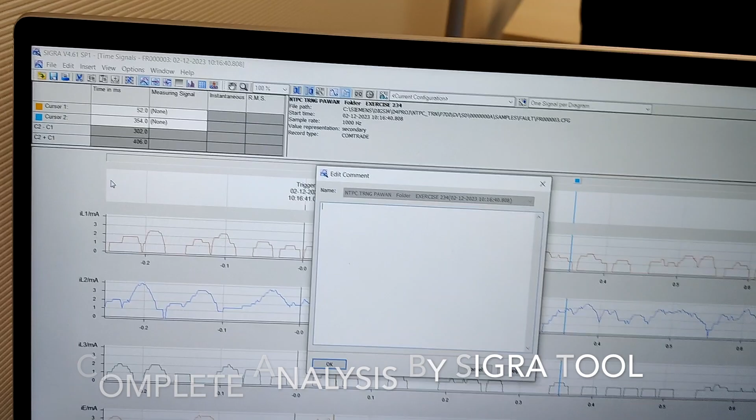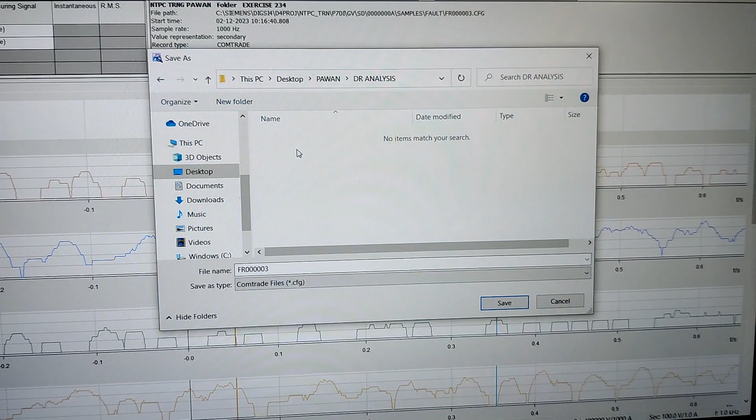Export this DR. So see here, whatever files I told you about, whenever I save a DR from SIGRA: the CFG file, .dat file, .dg4 file, .inf file, .xml, all those files have been exported here. Out of which CFG and DAT are mandatory for analyzing a DR. Only together can you open the DR, and the other things are auxiliary files. Maybe they will give you additional information. That's it.

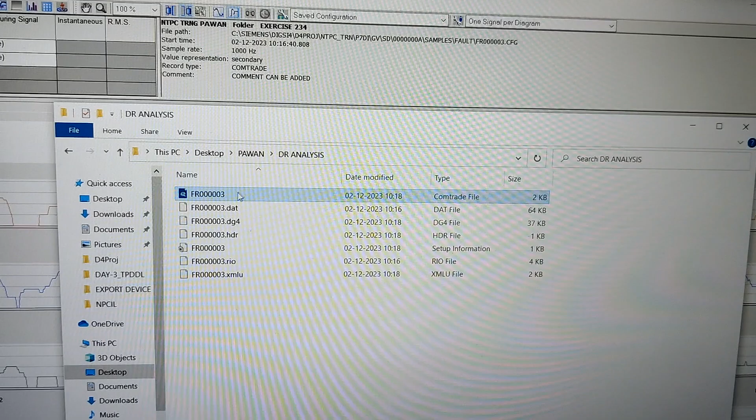So let me open this CFG file in Notepad. So how to do analysis without SIGRA? You can do a fault analysis even without SIGRA. You can open it in Notepad directly. So the CFG file, I told you, will have the configuration data, right? So here is the project file and the folder where the file exists, and 30 is the total number of channels.

And out of 30, 23 are analog channels and 7 are digital channels. So in this DR configured device, you have 30 channels recorded, out of which 23 are analog and 7 are digital. The 23 analog channels are given below: IL1, IL2, IL3, 3I0, all those things. And the digital channels follow after the 23 analog channels.

In the digital channels, you can see the first signal is flag last configure, this is the address number, and the last 0 represents that it is currently low in this DR. Similarly for relay trip and everything, because this is a manual trigger DR, all the digital channels are low, so that's why it shows 0 at the end. At the time the DR is triggered, if a relay trip happened by that time, relay trip will be high, it will be 1.

So this, which one, sir? This is the address.

Only for analog signals will you get the CT ratio and PT ratio. In case it is a CT channel, IL1 here is your CT channel. At the end you can see 2 into e power 2, which means 200, and secondary 1 into e power 0, which is 1. 200 by 1 is your CT ratio here.

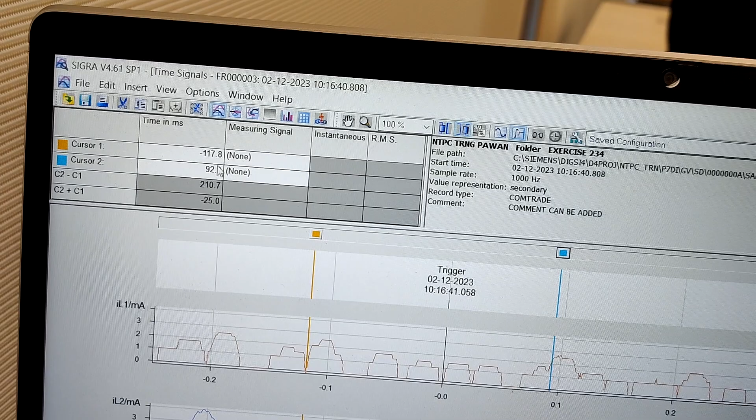So these two cursors are used to find the relative timing or relative threshold differences, for example between the time of tripping and pickup. You can keep the orange cursor on the pickup value and move the blue cursor to the trip value. In this table you will find the relative timing and which signal you want to measure. All the analog signals are available here. If you click an analog signal, you see the current value recorded in this DR at that moment. This is for cursor 1, the orange cursor, and this is for cursor 2.

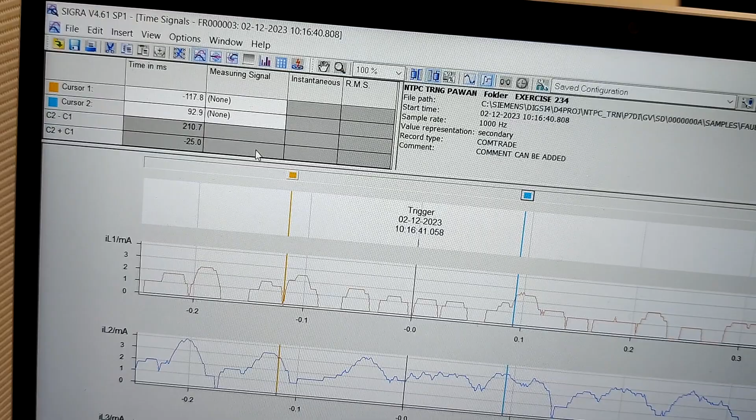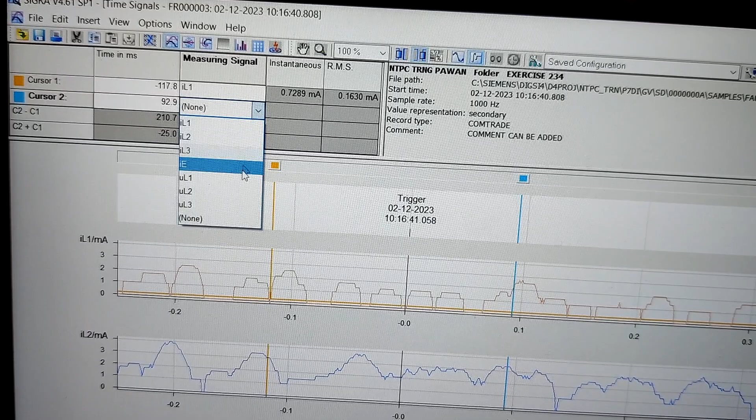But in this time scale, how will we know the moment when the relay has picked up? You will find it in the DR channel, right? If you are configuring a pickup digital channel for DR. We have to synchronize these things. And the timing here, which is 0, is generally based on your settings in the relay: start with pickup or save with pickup. It is not fixed actually.

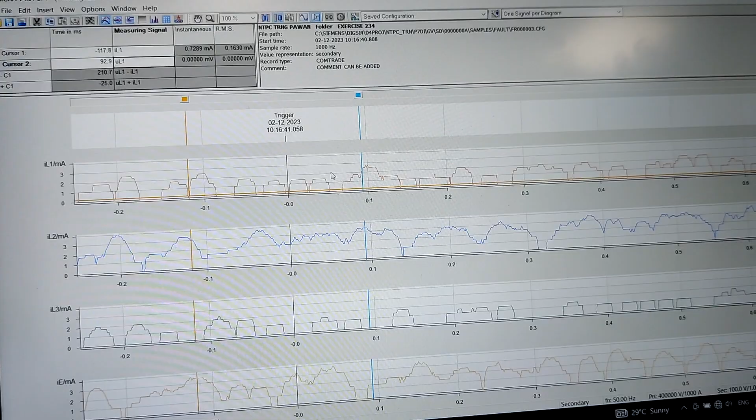You can move this cursor and find any values with it. The blue ones, those are the two cursors available, as per your flexibility. So go to the time signal and keep the red cursor wherever you want to know the values. Keep the cursor there and click the table view. The corresponding values of all the analog channels will be reflected here.

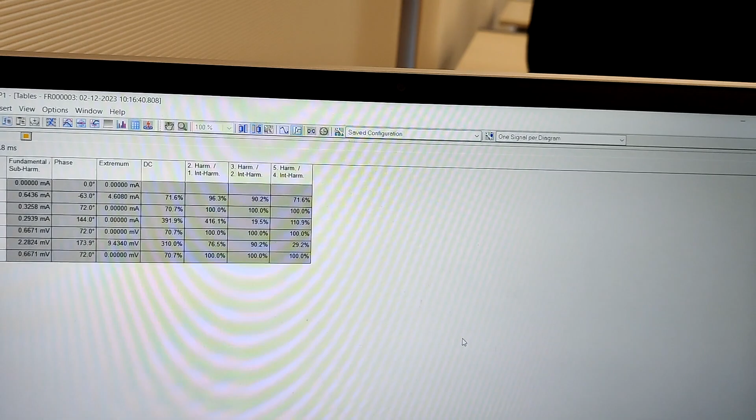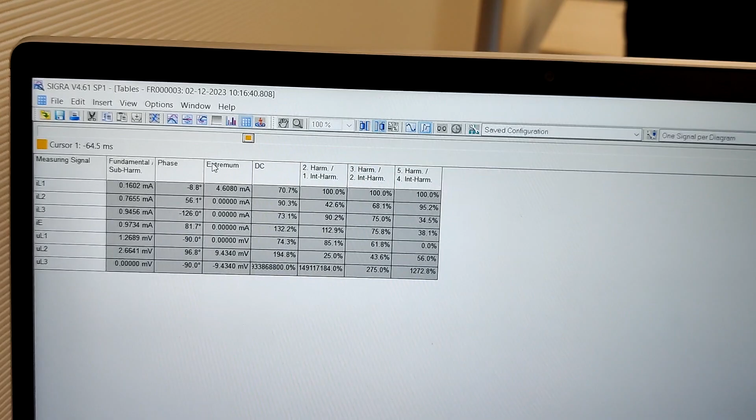But this view will be having only one cursor, and wherever you are keeping the cursor in the time signals, that will be reflected. But if you want, you can move here. Yes, sir. Harmonics I'll also explain. So the signals will be grouped. All analog signals will be grouped, current and voltage, and you can see them down. Then you can uncheck the signals also.

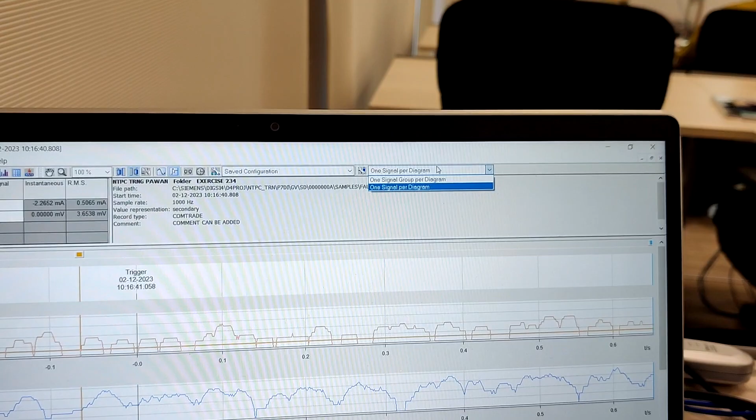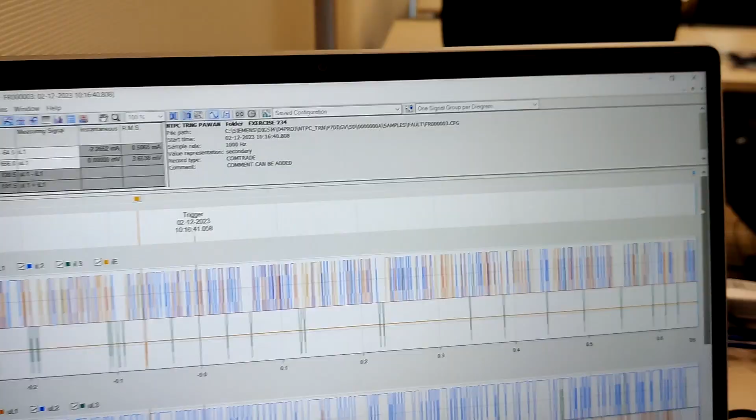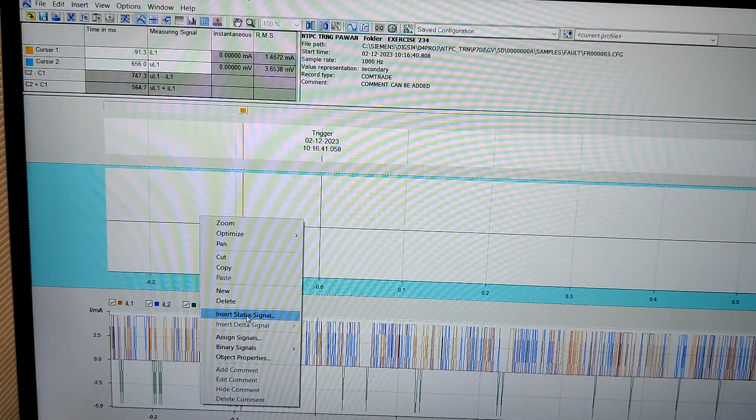Just 2 bits. So if you want again, just go here, new drawing. Then you can configure whatever signal you want, right? We can delete this, or we can add a new one. New is added. You can assign the signal. Insert status signal. Even you can group every signal to one diagram also. It's up to you. Analog signal.

And when you save this, it will be stored in the DG4 file. DG4 is a proprietary file, so it will be used for your profile. And then you can use different profiles also. For example, each user wants to view in a different way, right? So we can customize this and save it as a different user profile.

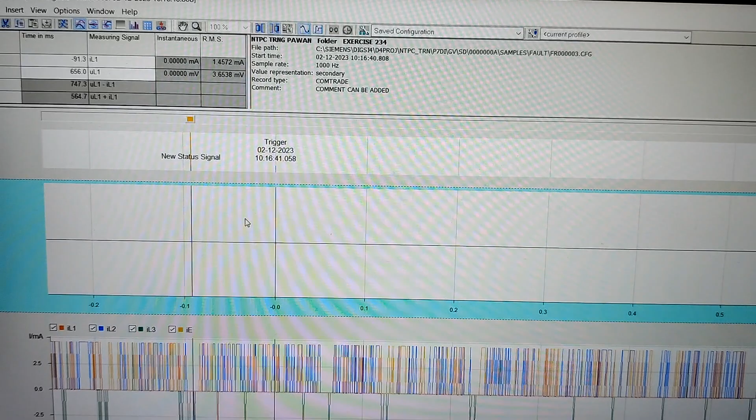Somebody will be familiar with seeing those signals individually. Somebody may be familiar with grouping those signals. So as per your familiarity, you can change and save only for you. Some other person will come and open it, and it will open in the default format.

Okay, and in the signals, Naveen has shown you those channels. So whatever analog channels have been recorded in this device, all those things will be there. Only thing is that you need to configure. It will not be visible immediately. For example, the frequency value will not be there in front of you immediately, but you can assign it from there.

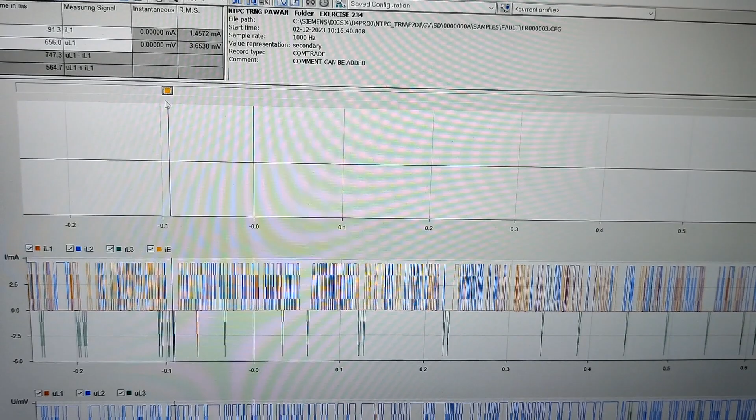Like how you do in the routing matrix, right? Like that, if you don't want another signal, just go and uncheck. And whatever signals you need, you can check. This is a triggered DR, so that's why it is showing 7.

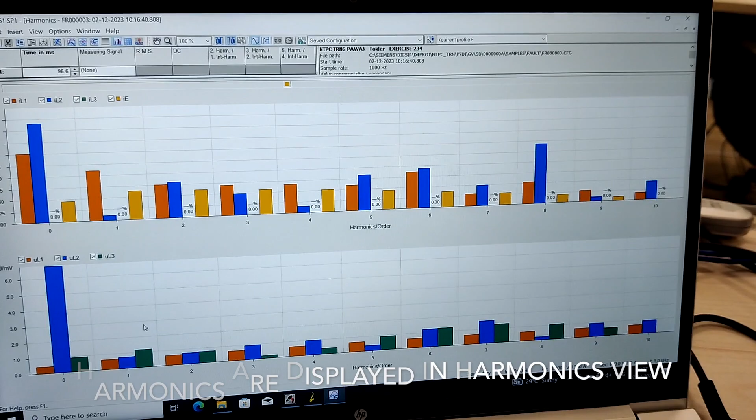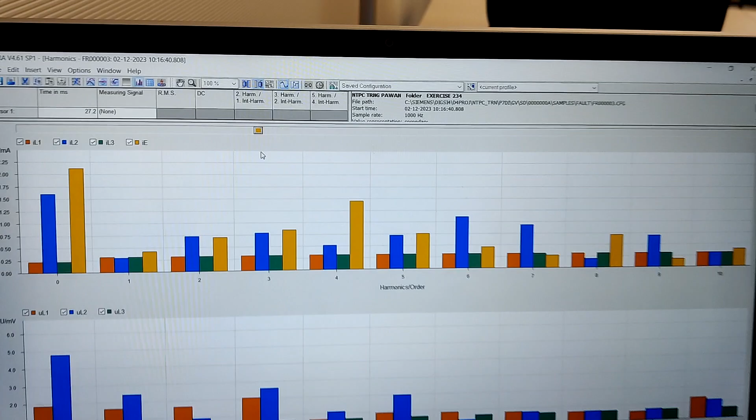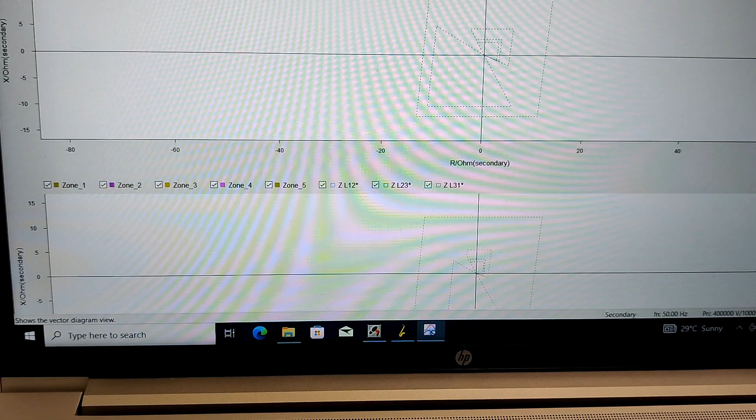Next to harmonics, we have a circle diagram. If you are having a pole slip DR or mho characteristics, then you will get to know those details. After this, you will be having the vector diagram: R, Y, B, and neutral phases, and the vector range. Here in the vector diagram also, you will be getting two cursors. So if you want to analyze the phase angle between your current and voltage, you can view it through the vector diagram.

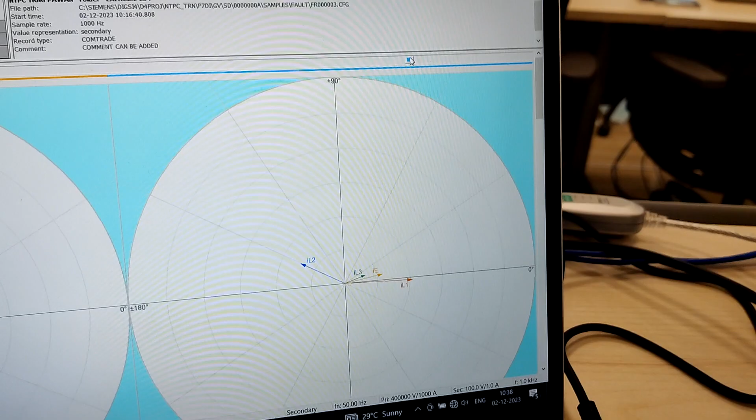And in the circle diagram, even in distance protection, if you are having distance characteristics, those characteristics will be available over here. And in case of a power swing DR, out of step DR, you will get to know where the swing came, how it entered into your zone, and how it went back. All those things are visible in this circle diagram.

Yeah? No, that is vector. Vector is not only 2. R, Y, B and neutral, all 4 values will be there, as well as the voltage values.

Next to the vector diagram, we have time signal. And this one is assign signal. If you want to assign any voltage or analog signals, like frequency, you will be assigning here. This is a shortcut key for assign signal.

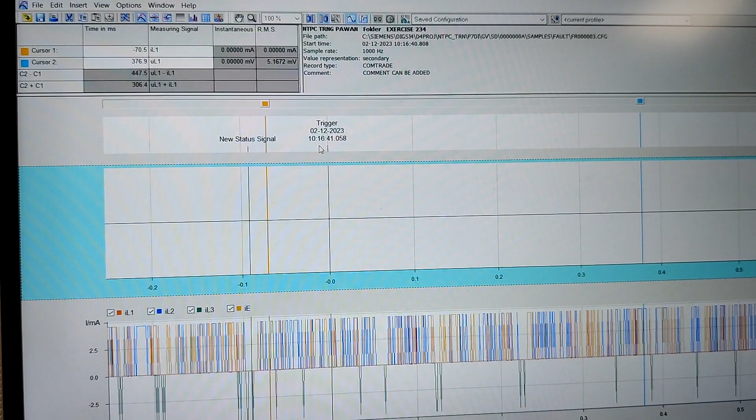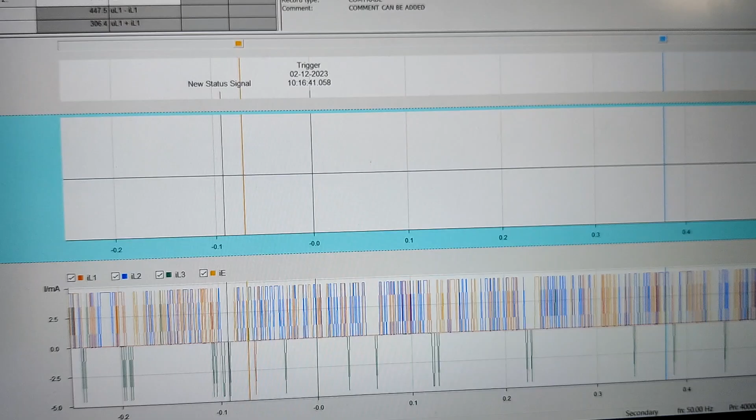Then the major thing would be the primary and secondary value. See, here you will find the primary value and secondary value. Whatever is showing in this table, if you want to know the primary value, you can get the primary value. And if you click the second one, then you will be getting the secondary value.

Here you will be having instantaneous values and RMS values. Separate options are there. You can view this DR either in instantaneous value or in RMS value. That's value in secondary. Yes.